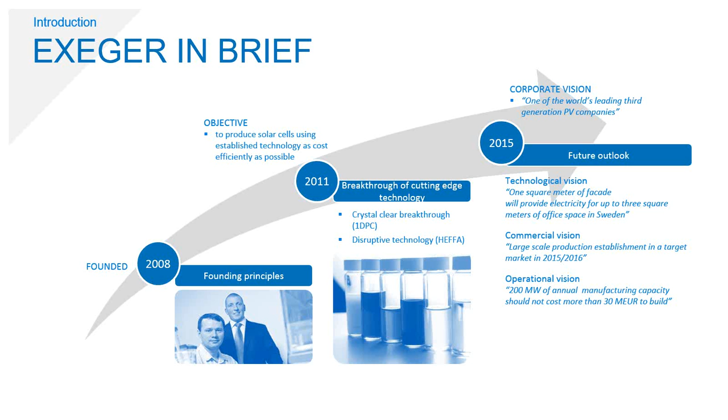So what is DSC? I won't go into details in such a short presentation, but we can mention that we can print our solar cell on any substrate, glass or plastic, and then we imitate photosynthesis. Instead of chlorophyll, we use other industrial dyes, and then titanium dioxide, which is the white in white paint or toothpaste, so it's a very cheap material, and then we dip that into dye.

I will not go into more detail, but those of you who are interested, I can provide you with more information.

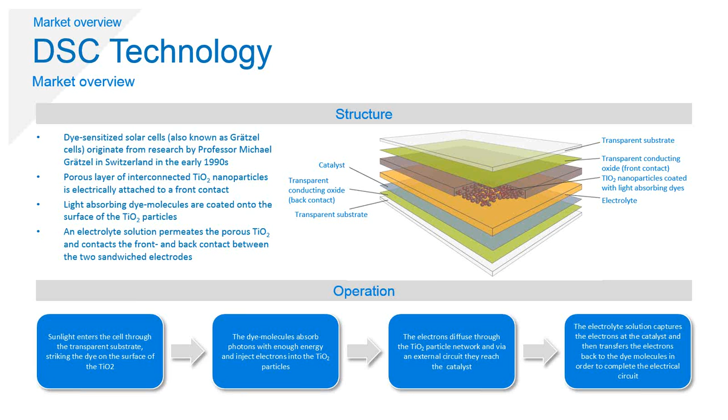The main advantages, compared to existing first and second generation solar technology, is that you can make the cell transparent and in different colors. This allows the solar cell to be seamlessly integrated into any product, for example consumer electronics. Because we use screen printing as our production methodology, we can print different patterns, pictures, even text, and you wouldn't even notice that the surface is a solar cell.

We can make the solar cell flexible, and print it on glass, metal foil, or plastic. Depending on the material we print it on, we get different durability. If we use glass as a substrate, we can get over 30 years lifetime of the solar cell.

One of the great advantages with DSC is that it's less sensitive to the light angle, the incoming angle of the light. The reason for this is that the solar cell is made out of a porous material. Think of a bucket of golf balls - it doesn't matter from which angle the light comes, it will always hit one of the balls in the bucket.

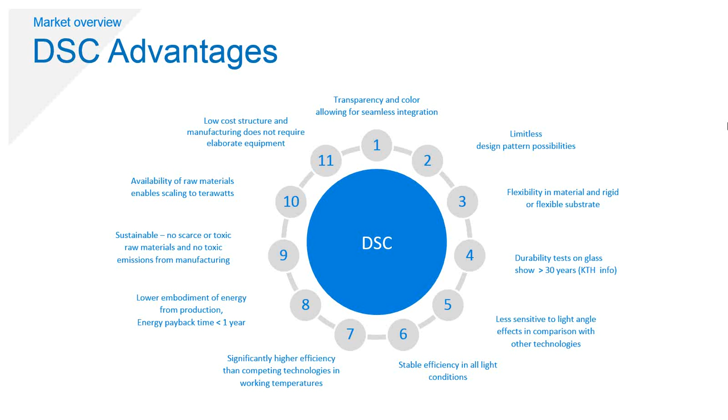Since we use screen printing, the same technology used to print T-shirts or similar things, it's a really simple production technology. We put our dye and our titanium dioxide into the printer, print several layers on a substrate, heat them, and then print again. So it's a really simple production technology that could be utilized, especially in a country like India.

So Exeger is mainly, in the first step, looking to enter the consumer electronics market. There are several reasons for this. Probably the most important one is that for consumer electronics the demands for lifetime is lower and the potential profit is much higher. At the moment we have developed a couple of prototypes, so we have working solar cells. We are building the largest DSC factory in the world here in the city center of Stockholm.

I'll give you an example. We have made a prototype for the Amazon Kindle. The Kindle itself retails for approximately $100 and the cover is about $40. We have made a prototype where we include a solar cell in the cover of the Kindle, and that could power the Kindle entirely in an indoor setting at 500 lux. So the value of such a solar cell is much higher per watt than the value of a normal silicon solar cell. That's the reason we target consumer electronics first.

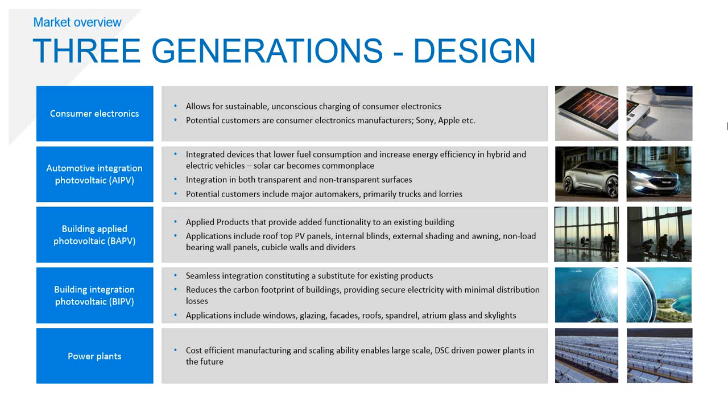This is a huge market that Exeger will tap into. We have a couple of prototypes also in this area. The last large application area that we look into is power plants. This of course will take a couple more years before we enter this market segment—there is a very high demand for lifetime and different certificates, so this will be our last target market.

If we look at Exeger as a company, we have cooperation with several academic institutions all over the world, for example with the inventor of the DSC solar cell, Professor Michael Grätzel in Switzerland. We have raised in total approximately $30 million since we founded the company. One of our biggest contributors is the Swedish Energy Agency. We have also received money from the European Union and from different governmental organizations in Scandinavia and Sweden.

One of our largest owners is a company called Fasadglas, a more than 100-year-old Swedish facade glass company. We also have a cooperation with Ericsson, as you all know, and another one of our owners is Wallenstam, the biggest Swedish real estate company listed on the Stockholm Stock Exchange. In addition, we have several companies we cooperate with and develop prototypes together with, which I will not mention in this short talk.

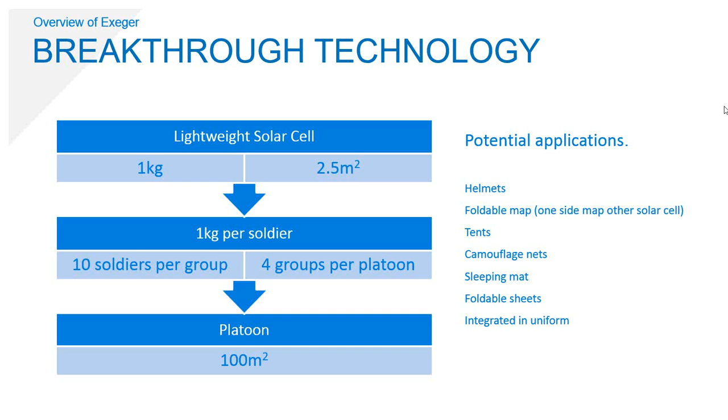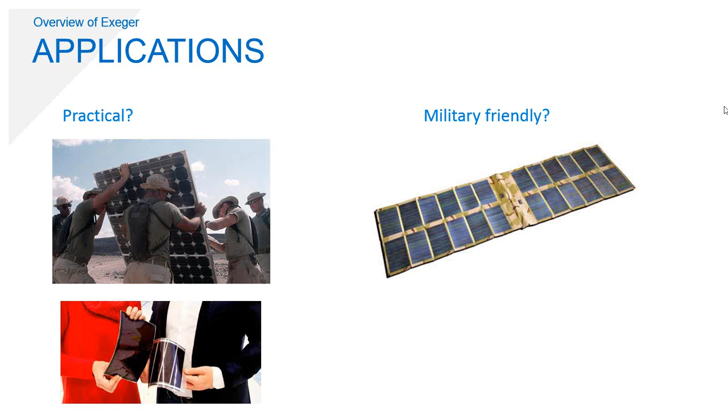It's not so practical to carry around a silicon solar module, so it would be better to use our solar cell, which we see in the bottom left corner. The market is actually already there, so we don't have to invent it. Here we see a couple of pictures of existing products, all from the American Army - foldable mats and tents.

The main technology used in these pictures is amorphous silicon, which we know we beat under these environmental circumstances. So we don't have to invent the market, it's already there.

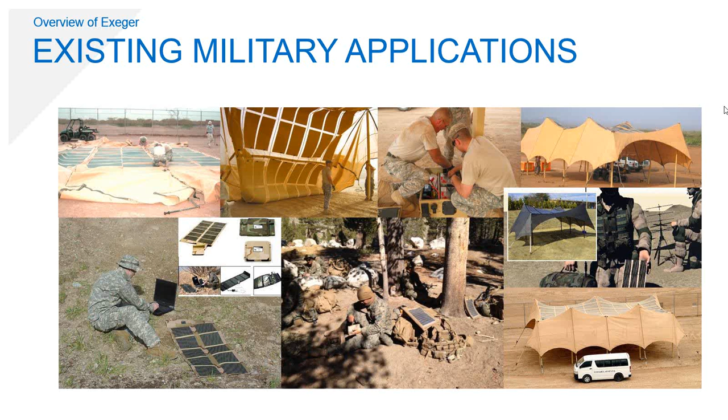To summarize, the company was founded in 2008. We have secured more than $30 million in funding in total. We are now building the largest factory in the world here in the city center of Stockholm - a 15 to 20 megawatt production facility. We are going to scale up as soon as we have production running here in Stockholm.

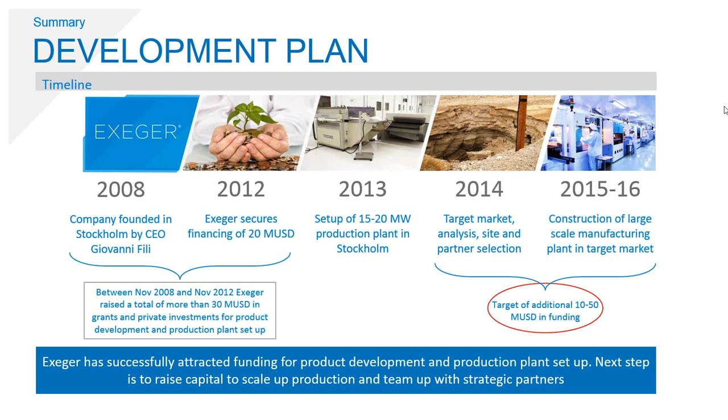We're going to scale up and build large factories around the world, and India is one of our target markets. In order to do this, we will of course raise more money in the future. That was all from my side. Now I'm happy to take some questions if anybody has any.

Sorry, there seems to be some sort of misperception of the slides here. I apologize for this. I will try to fix this.

Let me finalize this slide then by explaining in what areas the company operates. As mentioned, the backbone of the company is coating and heat transfer technology, where we have a series of proven technologies working across the world today. In addition to that, moving up the value chain, we have developed solar collector systems and panels, high performance solar panels with a good top performance in terms of energy production at a price and quality ratio attractive in most parts of the world.

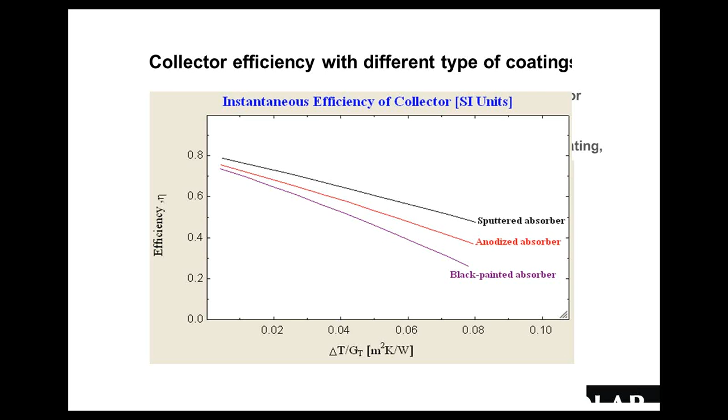The sputtered absorber that Sunstrip and S-Solar produces has some advantages over the other types of absorbers. And briefly, the sputtered absorbers can preferably be used both in standard flat plate collectors, reflector collectors, or vacuum tubes.

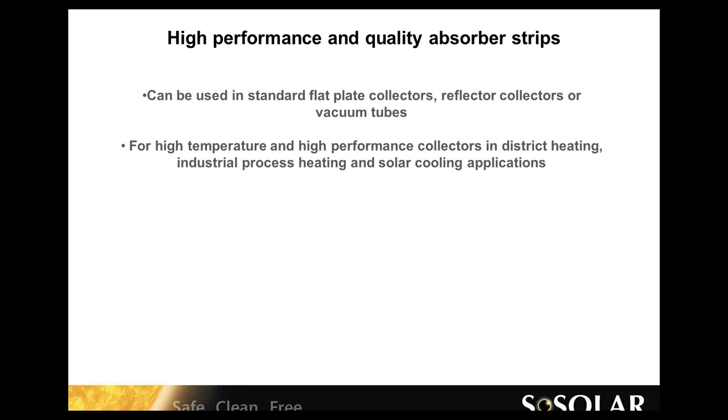But where we see an increasing demand for our sputtered strips is for the high temperature and high performance collectors in both district heating, primarily industrial process heating, a growing area, also in India what I understand, and the solar cooling applications. So for Singapore University, these strips are being used to create the world's largest solar cooling plant or installation in the world.

The different surfaces being sputtered on the aluminium metal is first of all a protection layer for the metal, and then the most advanced, the 150 nanometers thick absorption layer with a composite that is to maximize the absorption of the visible sun rays and sunlight while reducing the emission.

So the performance today, using also an anti-reflection layer to prevent, is 96.5. 96% of the sunlight is being absorbed, and only 5 to 6% being emitted in emission, which creates this opportunity to go beyond 200 degrees, even up to 400 degrees Celsius in hot water production,

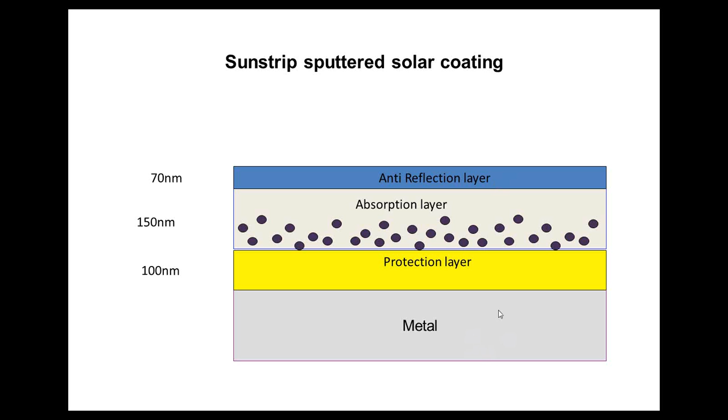required for many industries. The production process patented by Sunstrip and S-Solar has 3 main parts: the roll-bound part, the cleaning part of the metals, and then the batch process sputtering part. It's a 24/7 type of production process, which makes it very attractive and could produce very large amounts of strips around the clock, basically. The process is then highly automated and has a technological edge to it.

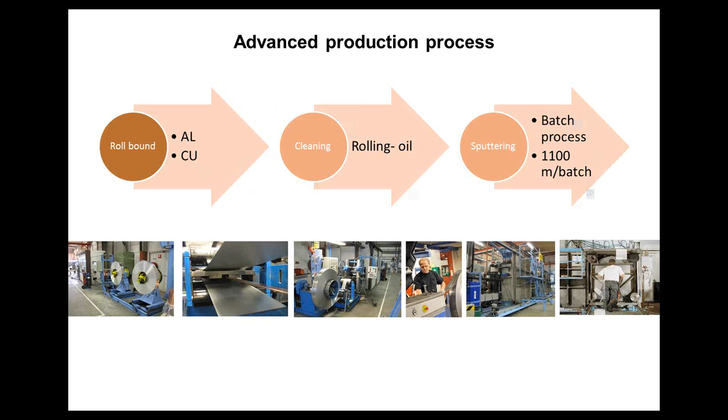Moving on, I mentioned before that the investments being made during the recent years is partly going into a new type of coating. And the name of this coating is a general one. If you go into Wikipedia or any other information source, you can learn that Sol-Gel is a generic word for application of a very thin surface to change the surface characteristics and

functions. The reason why we went into this together with one of the leading universities in Sweden, the Ångström's laboratory in Uppsala, is that we recognized an increasing demand from our customers to expand and to have a more cost-efficient coating than was existing in the marketplace, especially made for certain applications. And as the word says, it's more than just the surface. What is then Sol-Gel? It's a new type of patented coating technology. We also achieved a patent for the Indian market.

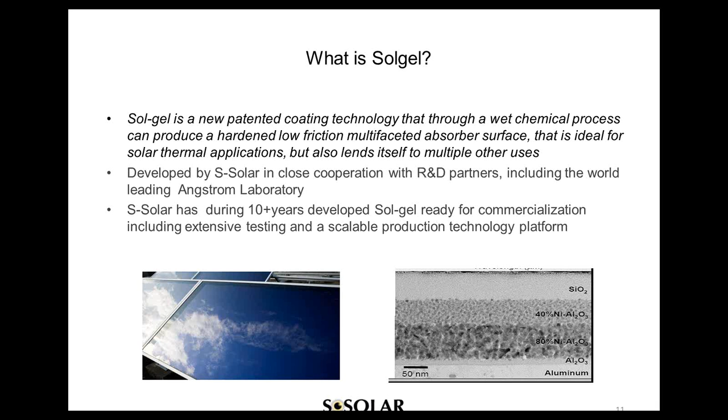What are the advantages of Sol-Gel?

First of all, it has advanced quality and performance. But maybe more importantly, we have responded to some of the requirements from the market, from construction companies, building materials companies, glass manufacturers, to provide a surface that could handle different levels of moisture and heat. It has an optimized optical performance too, with a 97% absorption of the sunlight.

It is also an environmental friendly production process, with basically no emissions. And very few technologies could actually say that.

We're using proven coating techniques, so there's a low-risk production technology used, including a slot die technique and heating techniques. The technical platform is scalable and can be used for many different types of applications.

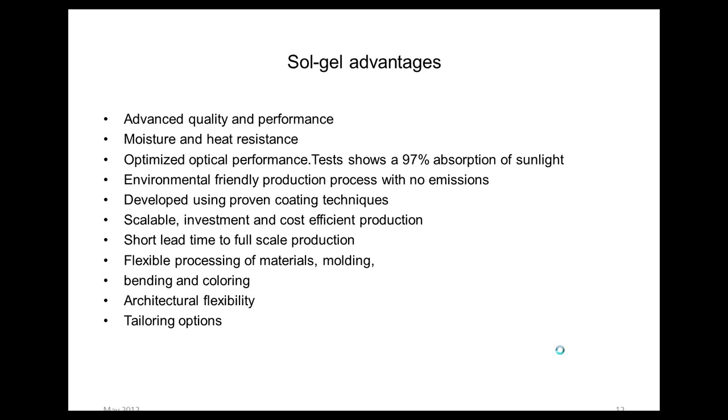Of course, the main function or the application is to create a low emission roof or facades, to reduce the need for cooling or heating of buildings. And this is what we call the climate shell function or the building envelope function.

It could create a harder and more sustainable surface, also on softer materials like aluminium, but also other types of material. It could provide corrosion protection on metals. It could reject dirt, and it could be self-cleaning.

And it can create a luminous, different light colors activated by UV or IR. And it certainly works as an anti-reflection surface, which makes it attractive to various industries, not only the solar thermal and building facade industries, but also to the aerospace industry, the automotive industry, etc. And it has a very low heat emission.

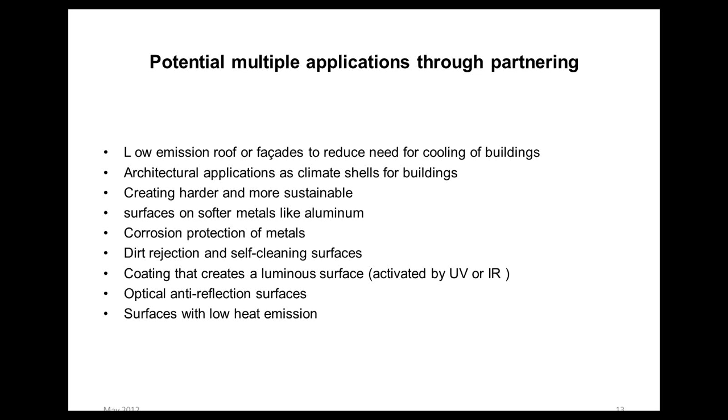The concept that we work with is the climate shield, which has proven in Europe to be a leading concept being spoken about and interest gained, but also raising the demand for technologies, reducing the need of energy, and providing an attractive design feature. Also to increase the value of the building.

Mentioning again China or the UK as two examples, there are a number of green building or LEED and BREEAM ambition projects in those countries, where they see that this technology will increase the value of the building, which has been proven in several studies.

It's also safe and economically viable long term, lasting more than 30 years, and has been extensively tested in age chambers and by independent test institutes, providing both a safe surface and economically viable, less expensive than many of the facade materials used today in high-end market buildings.

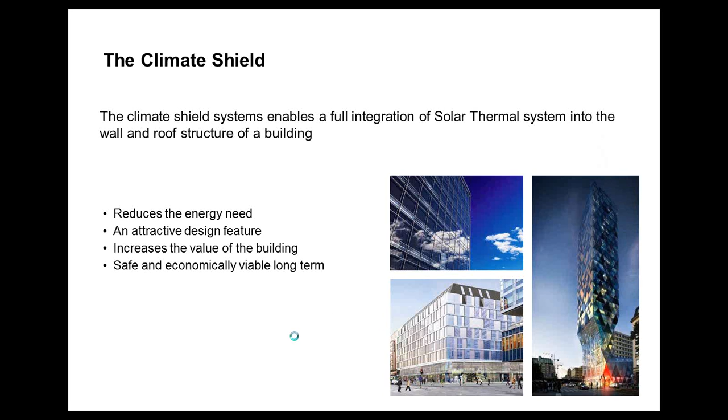If we move on to the more enhanced products, the solar panels, the solar facades, in which we plan to use Sol-Gel too, we have laid out a new platform, like the automotive industry. We have developed a technical platform that we name Prisma, which is more than just a facade, providing green energy. It has a high aesthetic value, and it is proven to be economical compared to traditional technology.

What is then Prisma? It's an innovative facade element that could reduce the need for energy by more than 50% by insulating the building from heating and cooling. It has a multifunction element to it, not only to protect but also to generate energy. It is also an architectural design element to create a flexible and expressive look of the building.

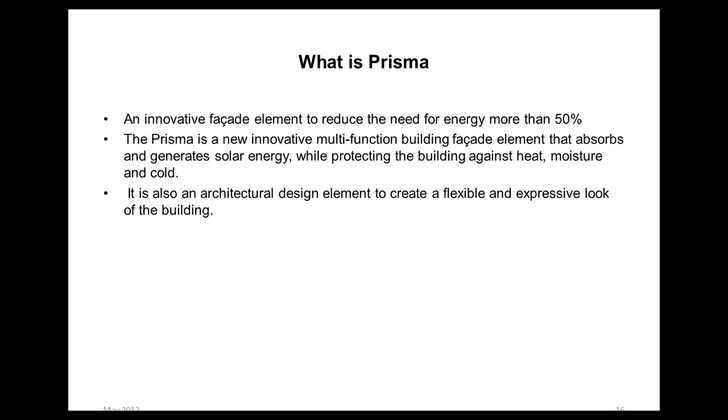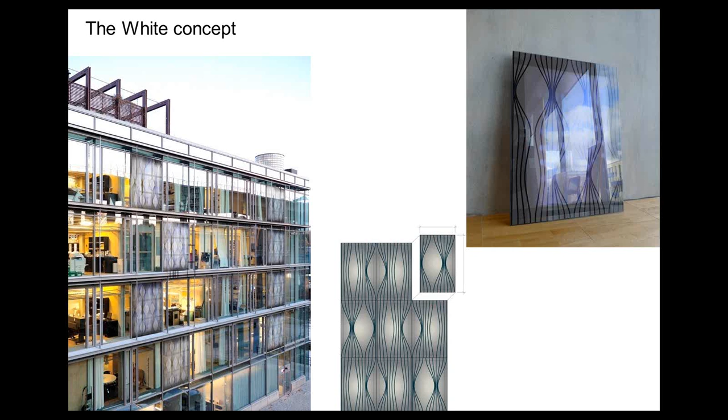These 4 pictures describe how an architect would use solar thermal in more advanced buildings. In more residential buildings, it could of course be used on the roofs and the facades. But we have worked extensively to make this a high-end product, high-end market product.

What is then different? As being said before, the climate shield reduces the need for heating and cooling, and it replaces standard wall structures. It's easy to install since it has been developed together with key building systems and glass companies providers. And it's available both in a building systems format or a cladding version.

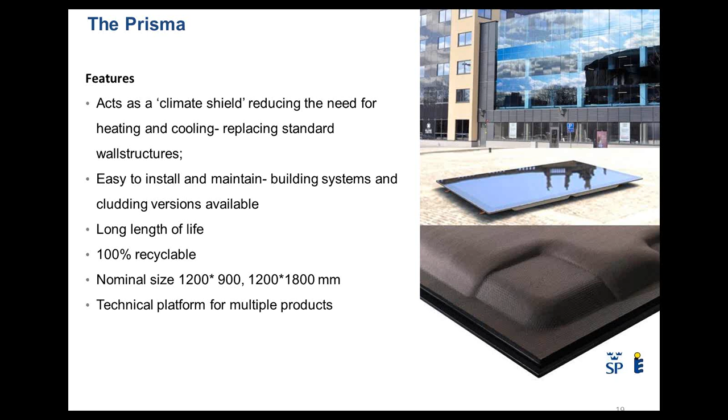Being made available for refurbishment of older buildings too. It has a long length of life, it's 100% recyclable, and comes in different sizes based on the standard nominal size. And it's a true technical platform for multiple new products.

It's like a LED TV, and the difference compared to most of the solar thermal panels that you see in the market today is that it's thin. It's no more than 5 centimeters, and the weight is only 8 kilos compared to 40 plus kilos for the traditional panels.

It's fully integrable, works in both new constructions and refurbishments. It's been fully certified and given Solar Keymark tests in Europe. The Solar Keymark test has very strong requirements and is being used in many parts of the world. It is aesthetical and ultra-thin design. You can choose sizes and colors.

It's patented and totally sealed, which is also different from other types of panels. It comes with mounting kits, so it's easily installed. A facade could be mounted in just a couple of days.

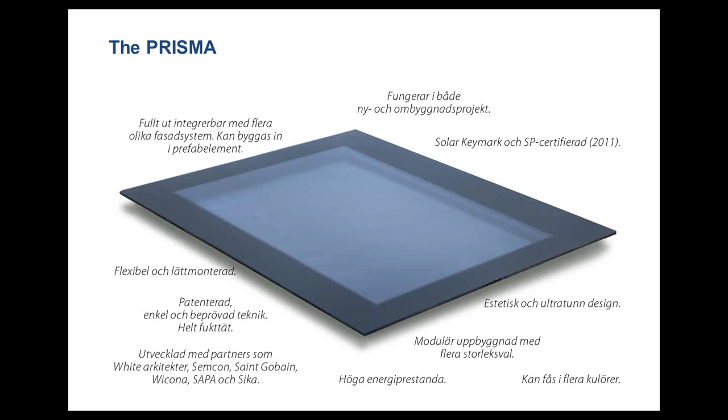The advantage is it's a unique product concept, reducing the need for energy. It has been proven compliant with industry standards for facades and buildings, with a long lifespan and green energy with zero emissions.

It can provide a fixed low energy price for the next 30 years, independent of gas prices and oil crises. And it increases the market value of the building. From an operator or a co-owner perspective, it presents a very attractive market potential.

It is definitely ready for large-scale market launch in other countries. It has been confirmed by architects and can gain interest of architects in other countries. We already work with some of the leading European global architect firms today.

It has gained interest from the construction industry, real estate holders, and also tenants. In Stockholm, there have been requirements made by tenants to have this type of technology in office buildings. And it's patented in the main markets today, ensuring the important points in green building classifications.

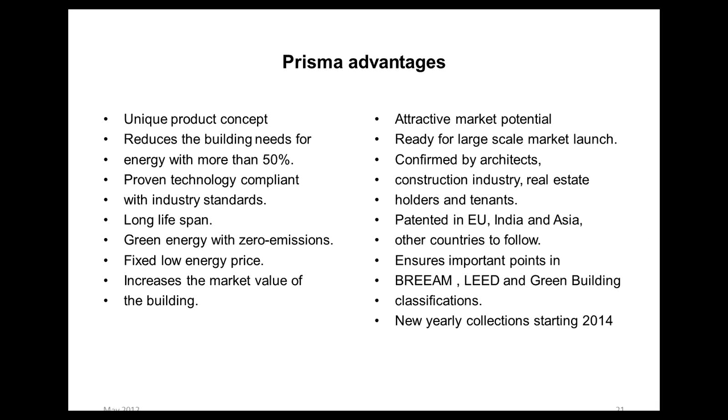We are already launching new collections with new designs based on this technical platform to respond to specific project requirements. On this page you can see what I call the classical collectors, which we call the Orbit, for roof and wall integration.

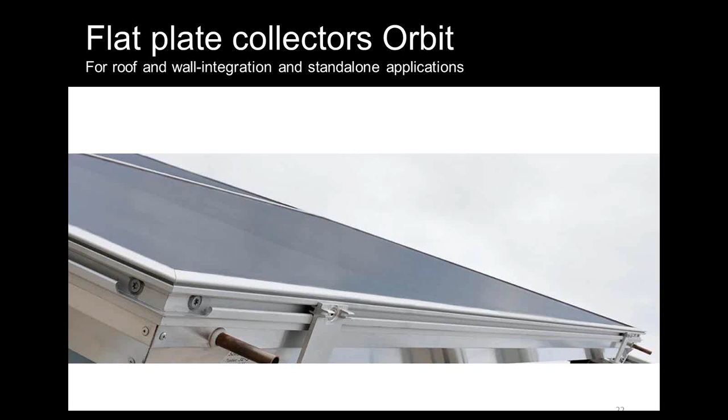The application areas where we work the most are multifamily houses, hospitals, hotels, retail centers and malls. Official buildings have become a growing sector for us because the government wants to show that their buildings are also providing green energy. And of course the office buildings, the high-scale buildings.

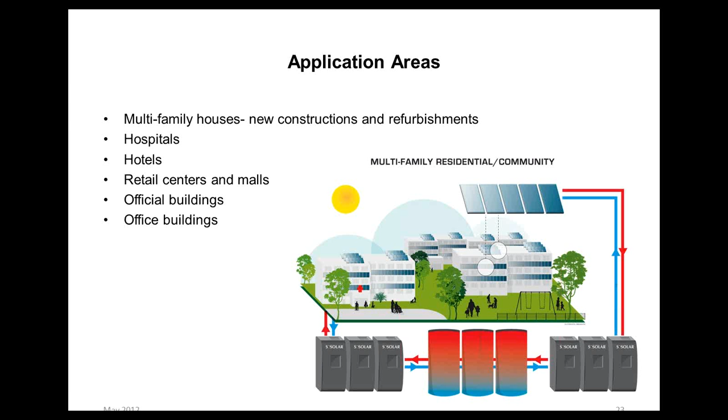In the stock exchange industry, we worked extensively with HCL Technologies outside Delhi, with very long-term contracts maintaining and developing technology for stock exchanges. That later led to a contract with the Mumbai Stock Exchange, providing them with a new trading engine.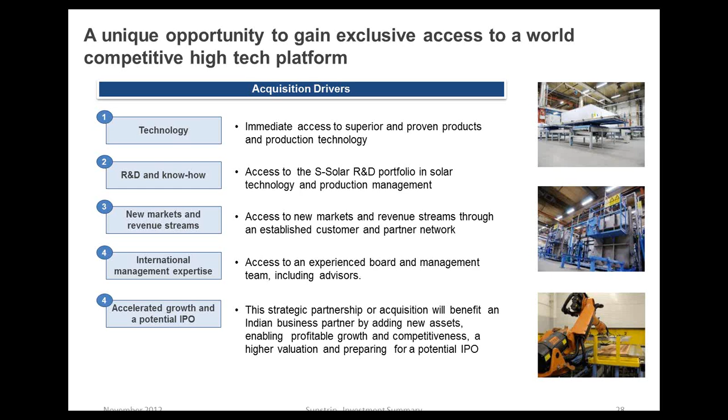So what is S-Solar seeking for India? An Indian strategic business partner, either for transfer or acquisition of technology, both the coating and the solar thermal technology. We could think about setting up a joint venture company with shared risks and investments. We will also look favorably into an Indian investor into our company today that could accelerate our R&D plans for the future, with the outcome of transferring that to our Indian partner.

That was my presentation, and I apologize for the somewhat disrupted presentation in the beginning. I don't know what happened to the slides, but I'm sure you can access this in some way afterwards. You can also look into our website, ssolar.com, to get more information. Thank you for listening.

Thank you, Mr. Klaus. That was a great presentation from you. This is Prasanna here.

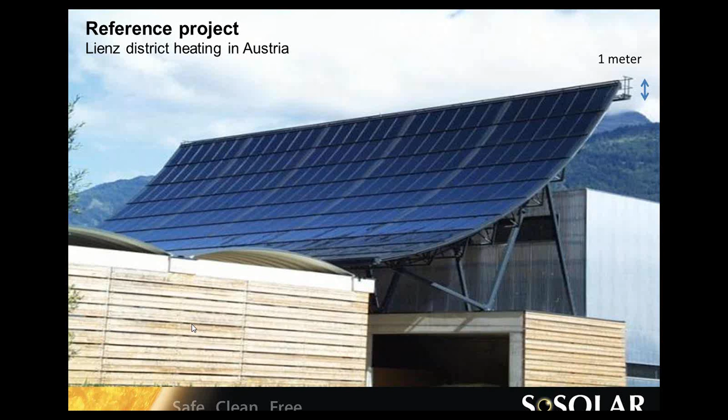I think this was an interesting webinar. We had two companies that exemplify very well the target groups from the Swedish side. They both represent cutting-edge technologies and both have great relevance for India, and both companies have great openness to share their knowledge about the opportunities provided by their technology. I really look forward to working with these companies, and with Indian partners, to see what can happen.